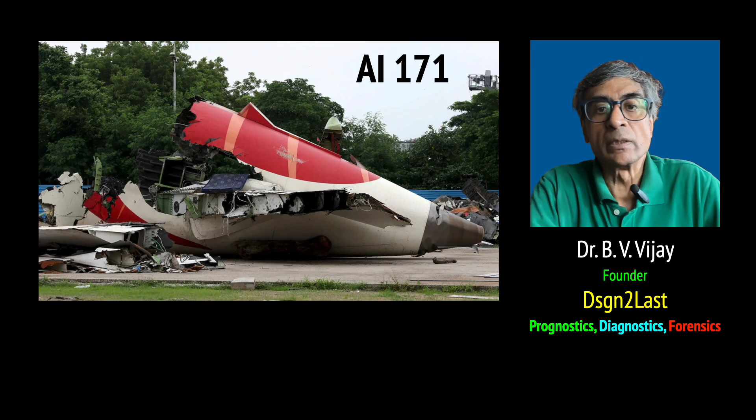Hello everyone, this is yet another video on the AI-171 crash and the fuel control switch system. Since the last video I posted in December 2025 on the GM ignition switch and the deadly parallel between them, I looked into the operation of the FC switches during the engine startup phase on the ground as the aircraft are being pushed back.

Of course, not from the AI-171 but from other aircraft of the same class, the Boeing 787 Dreamliners. I did it because I suspected there is a possibility for the engine excitation to reach this fuel control system, the switches system, if the frequencies were to clash.

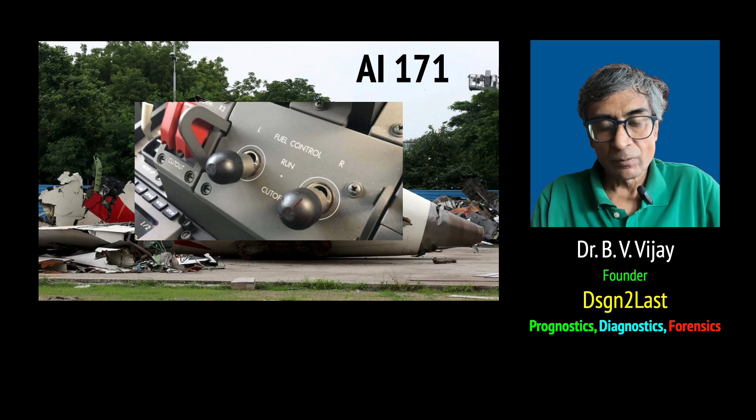Now I am led to believe from what I'm going to show you in this video that safety seems to be on the edge when it comes to the fuel control switches. That's plainly because I'm finding a serious crossing of the engine excitation with the operating spectra of the fuel control switches. It's not necessarily a reason to be panicking about, because aircraft are flying, of course, with the same characteristics more or less of the engine excitation and the operating spectra.

I'll try to explain why we might have seen something different happen in the AI-171's case. Okay, so let's get started. This is exactly what I've done.

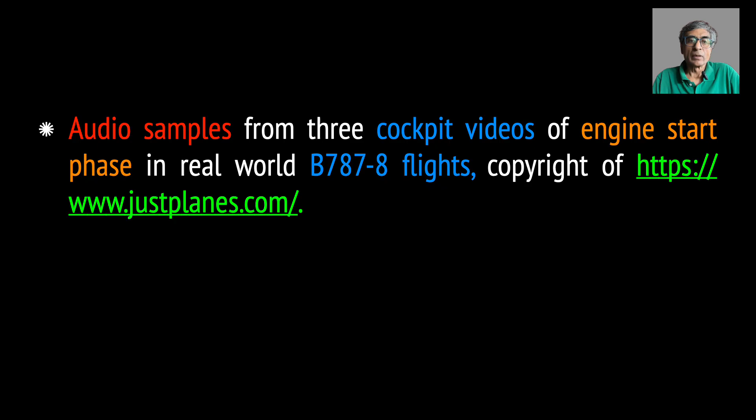I got hold of 3 cockpit videos of the engine start phase from real-world B787 flights, thanks to the YouTube videos posted by justplanes.com, a big shout out to them. From these audio samples, I extracted the spectrograms in the intervals in which only the FC switch operations were taking place. I had to weed out things like cockpit conversations between crew, ATC and crew, ground and crew, and other operations besides the FC switches.

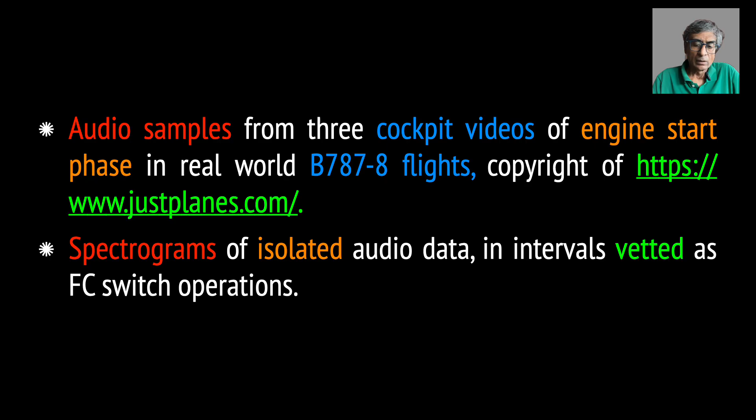I also went for a 4th flight, independent of these 3, in order to capture the engine's content from the takeoff run. If you remember the preliminary report of the investigators last year, it clearly said that once the AI-171 got airborne and reached a speed of 180 knots, both fuel control switches transitioned from run to cutoff within a 1-second interval. So I am trying to see if I can reach that same condition from other data, public domain data of course.

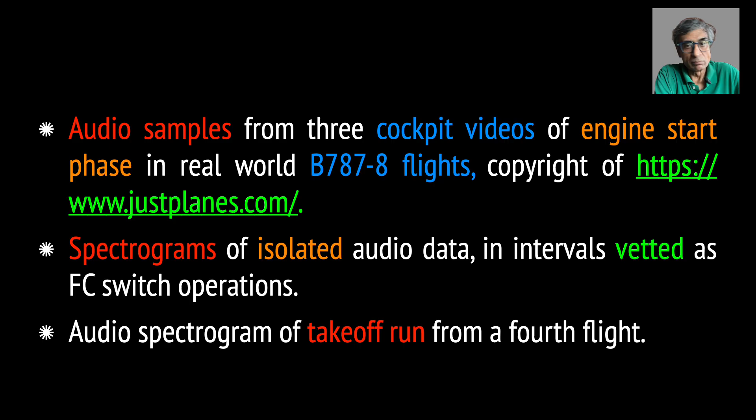I may not be able to prove that this indeed was the cause of the transition, but at least I believe I have narrowed down the possibilities, or opened up a new room for thought. So the billion dollar question: who is the likely culprit in the run-cutoff transition? I cannot prove it, but I can at least get a little nearer to it than how far I've gone till now.

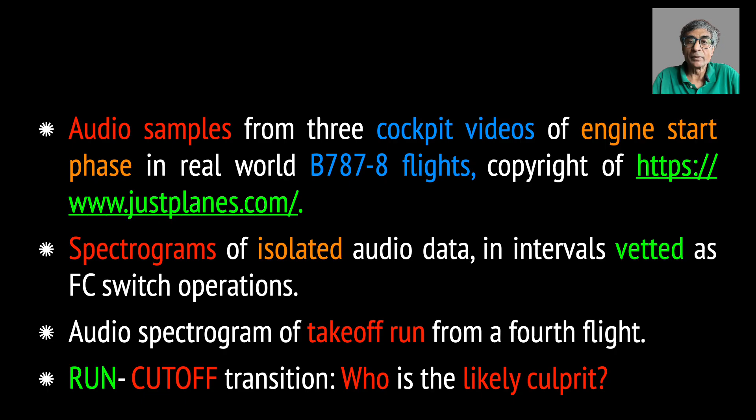All right, let's get to the first video now, the cockpit video. This is a video of a flight between New York JFK and a place called Casablanca, and I'm calling it NY-CB for short.

On top left you see a timer, 00:00 and so on, which starts ticking once the video plays. The units are in milliseconds, seconds, minutes, and hours. You need to focus just on the milliseconds and seconds, because the operations you're seeing, like 15363 to 55 and 21582 to 75, are all in seconds — but please don't mistake this for the actual duration of operation of each switch.

It is not. These are only the durations in which the acoustic content was very strong. There's always a silent part of the operation which doesn't produce any content. So the actual time duration of a switch operation is not merely this time, but much beyond it too. Because there was, and probably still is, some body of thinking that the pilots themselves did the transition within that 1-second interval, this should not mislead you into believing that might have happened here because of these timings.

All right, so just focus on the timer and these 2 intervals out here. They're going to always be present during the video, and try to see if you can sync the 2 things together as they happen. All right, let's get started.

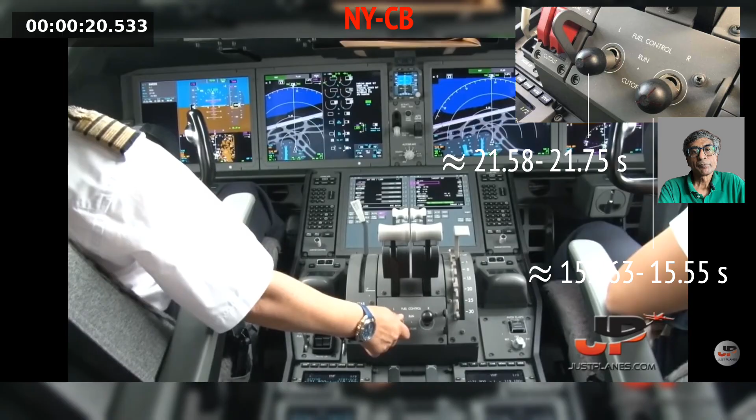All right, so I guess you could clearly see the switch being operated. This is one of the only videos which clearly shows the camera focusing on the switch itself, so you have additional visual information too, apart from the audible switch operation.

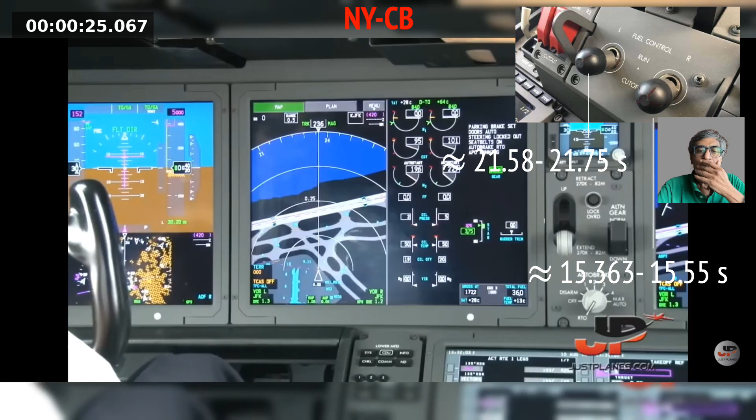Let's get to the spectrogram. This is the spectrogram of the right switch operation between 15.363 and 15.55 seconds. You see a kind of comb-like structure roughly there, and I've thrown in a line at 660 hertz. I'll come back later to what this line means and why it's important. For now, just note that this 660 hertz is running through a very strong part of the switch operation spectrum.

Now for the left switch, yes, this is a little clearer than the previous one. It's also got a clear comb-like structure, and again 660 hertz runs through the strong part of it.

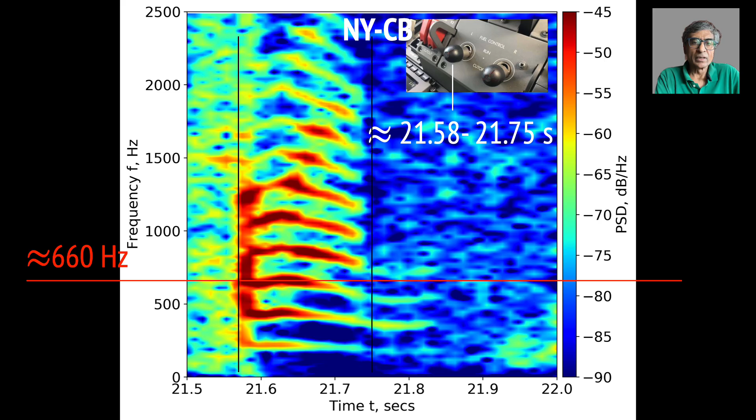Now let's get to the second video. This is for a flight between Heathrow, London and Amman, Jordan, on Royal Jordanian Airlines. So you know what to be looking at, just like the last video.

Okay, let's get going. Start and push. Please make sure the area is clear, all the doors and panels are closed. When you're ready, advise me to release parking brake. Yes, I already said that. Everything's all complete downstairs, release brakes please. Parking brake is released.

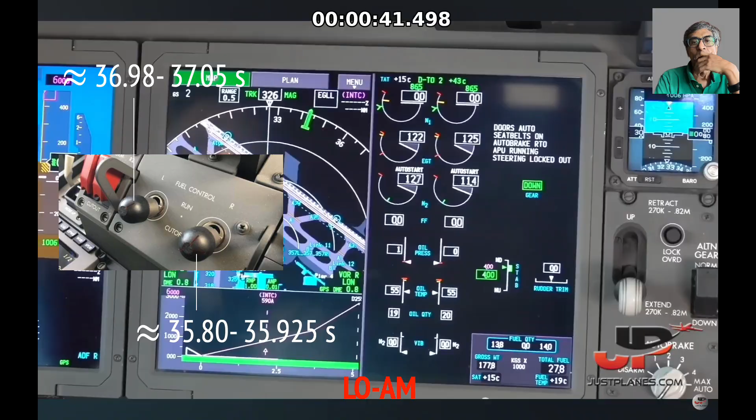Right, so you can see the two engines have started. If you look at the auto start on the cockpit display there, 137 and 125 RPM. Let's get to the spectrogram.

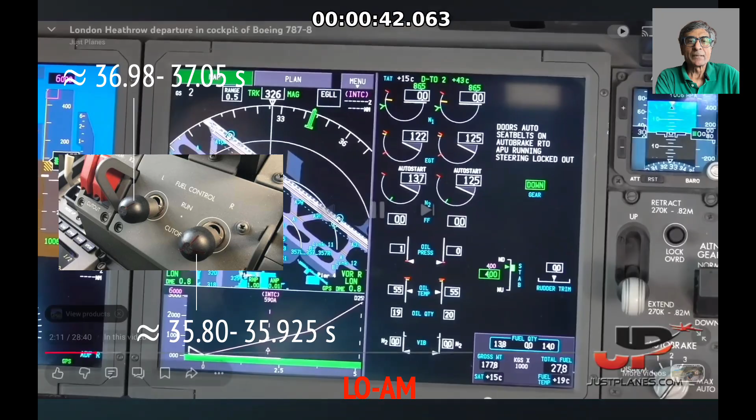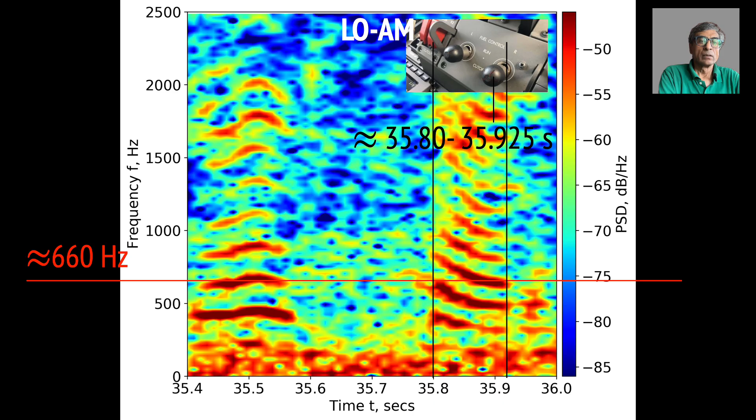Here's the right switch operation, from 35.8 to 35.92 seconds. Again, a similar comb-like structure that you saw in the previous flight, New York to Casablanca. 660 hertz, like always, is still cutting through the strong part of the spectrum.

For the left switch operation, that occurs between 36.98 and 37.05 seconds. Same thing holds here: 660 hertz cutting through a very strong part of the spectrum.

Now let's get to the third video, the last in this 3-video series on the cockpit engine startup phase. This is between Stockholm and Los Angeles, STLA as I call it.

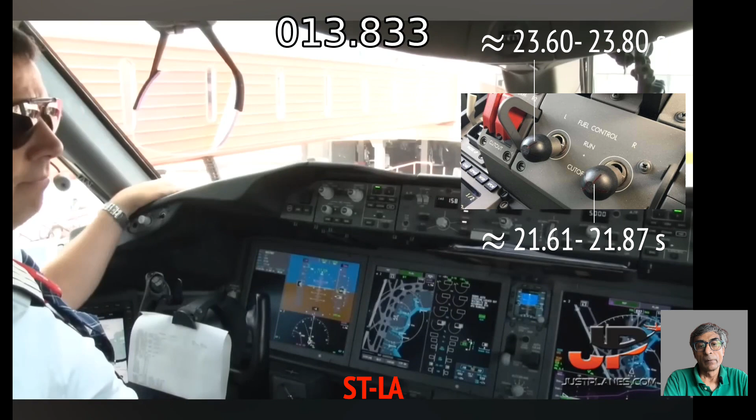Okay, on gate 34 I guess. Yeah, most likely. Okay, sure, brakes are released. Commence the pushback, brakes are released. You can start 2 and 1 in sequence. Copy that, we'll start 2 and 1 in sequence. Oliver, start right engine. And start left engine.

So I guess you could clearly hear the right switch click, but the left was a little bit lost in that ambient noise out there, in the hiss. So the spectrograms you're going to see also reflect that clear character and a little less clear character. Let's get this first spectrogram, the right switch.

This is the one from 21.61 to 21.87 seconds. That strong content you see to the left of this comb structure, around just past 21.5 seconds, that's the engine selector switch, which is on the roof of the cockpit. Once that's set to run, the engine is selected there. There are two selectors, one for the right and one for the left. Anyway, the 660 hertz is still cutting through the strong part of the spectrum, which is all you need to take note of here.

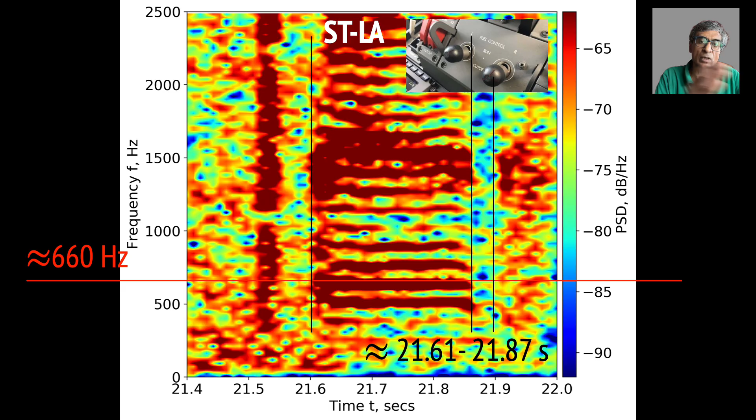When it comes to the left switch, as you saw, it was quite muffled to hear, and no surprise that the spectrogram is also a little less clear than the right switch spectrogram. But yes, the 660 hertz is still cutting through the strong part of it anyway.

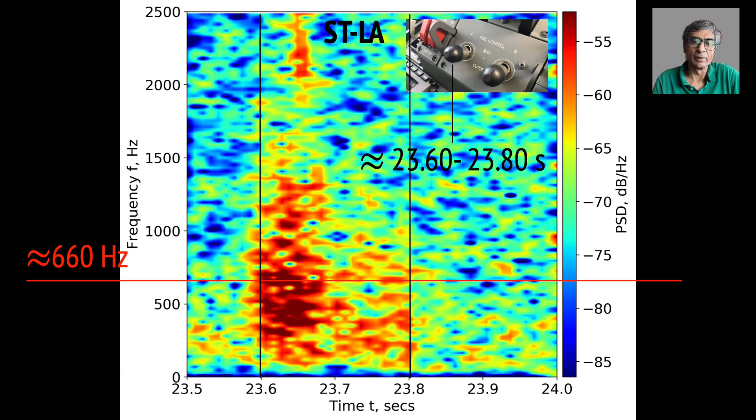Now let's get to the takeoff run. The timer is in the top center, and this is between Amsterdam and St. Martin, also a Boeing 787 Dreamliner. That's very important because I need to ensure the character of the engines is no different from that of the AI171. The things to watch out for here are the V1 call automatically coming from the cockpit, and the rotate call that comes from the crew member. Okay, let's get going.

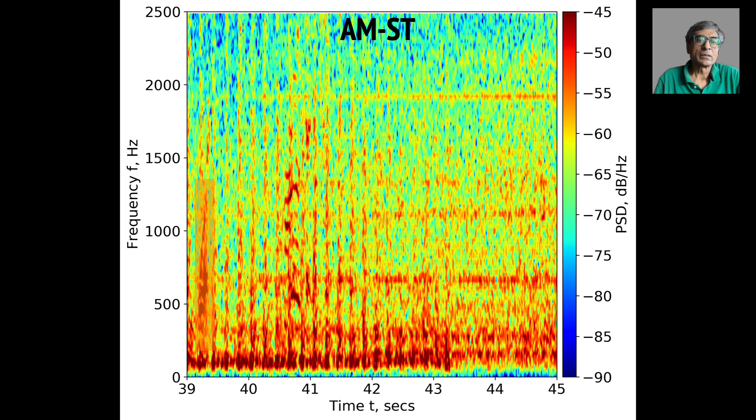You must have surely noticed that shudder in the cockpit somewhere around 47.5 to 48 seconds. And you could clearly match the V1 at 39.25 seconds with the rotate call from the crew member. Let's get to the spectrogram. 39.25 is the V1 and 40.5 to 41.25 is the rotate. So that's the V1 there, and that's the rotate out there.

If you look at the bottom of the spectrogram, and go back to the video, you would have heard a lot of duck, duck, duck, duck sound as the aircraft was reaching VR speed. The bottom of the spectrogram, around 125 hertz, is that discrete, comb-like structure. That's all that content flowing into the microphone here.

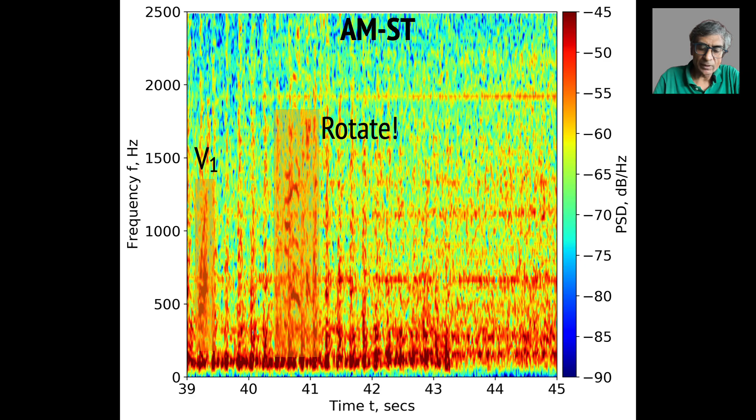You see that just past this line at 43.25 seconds, that significantly drops. That's because the nose wheel is now off the ground, so no longer do you have any ground input coming in of that strong kind. But yes, that content still persists, a little weakened, I guess because the nose wheel is still spinning, so it hasn't lost all the content there. Something from there is still reaching the cockpit.

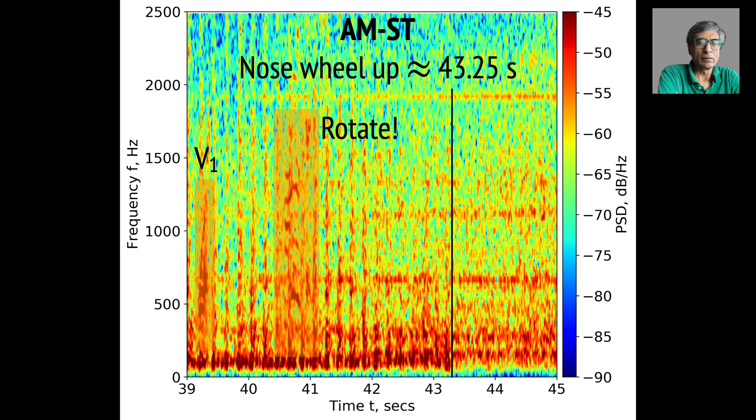Anyway, the point to note is not any of these things, but really the 660 hertz line is here. And you do see strong content at 660 hertz that seems to possibly even get stronger as you're nearing the VR.

Well, this rings a bell, obviously, right? Because if a frequency seems to be from an engine, and seems to be the same as that in the FC switch operation spectrum, it's likely there's a door that's open in the FC switch system to invite this energy at this frequency into the system.

Well, does it really mean a resonance and immediately a transition? No, it does not, because obviously all these flights which I have videos of, they are all flights that flew and are probably still flying today. So exactly what might have been the reason, I'm trying to offer the best explanation I can, because I'm working with very limited data, as you can obviously see. I can only make engineering guesses or engineering judgment. I can't prove anything or establish anything.

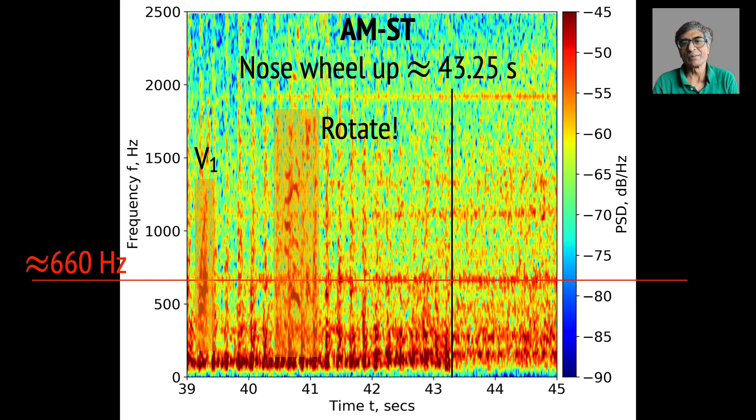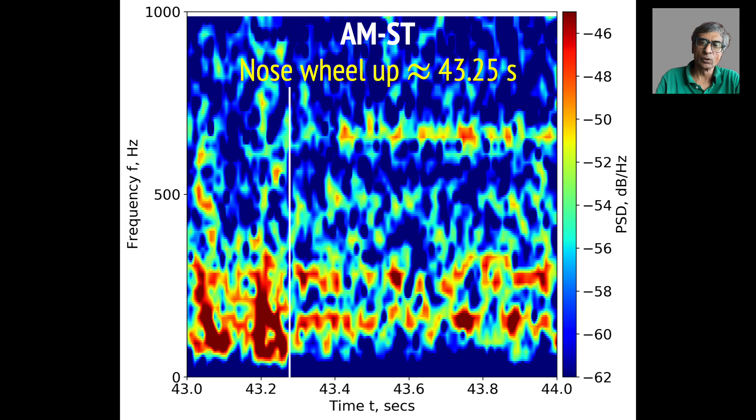Anyway, here's a little zoom-in of the same spectrogram, in case you couldn't figure things out clearly before. You can see up to 250 hertz, strong content lying there to the left of 43.25 seconds. That's coming from the ground and weakens as the nose wheel gets off. And at 660 hertz there, you see that component being relatively strong.

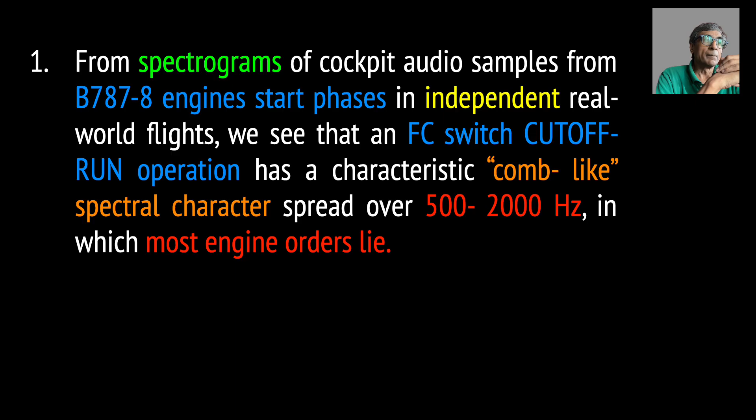All right, so let's summarize all the observations before we get to any analysis. What we've seen is a kind of comb-like spectral character of the FC switch operation from 500 to 2000 hertz, and the same range in which most engine orders also lie. If you go back to my very first video, posted before the preliminary report came, you would have seen that many of the frequencies I captured from that teenager's video and the spectrogram analysis also lie in this 500 to 2000 hertz range.

And also we can see that just as the nose wheel gets off the ground, there's a spike in the amplitude at 660 hertz. Right, so now let's see what happens when you try to argue the clashing of 660 hertz from the engine with the content in this FC switch operation.

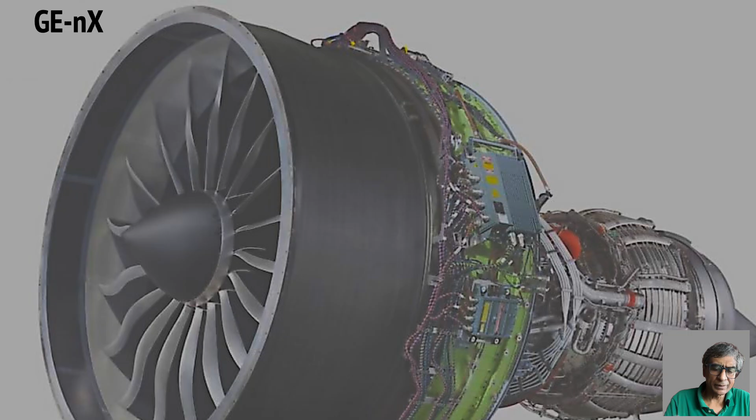So I'll start with the topmost picture of a GEnx engine to make my point here. The GEnx is the one that powers all the Dreamliners. If I were to represent the energy output of this engine, I might picture it like this, with the green part being, of course, the useful one: the thrust, the electric power, and the actuations.

And there's always, of course, a red part in any mechanical system. There's nothing that's 100% efficient, so it's not fully green. That's the waste part. But this is not a waste in the sense of a commercial loss. It's a waste in an engineering sense. It's a waste of what? It's a waste of energy.

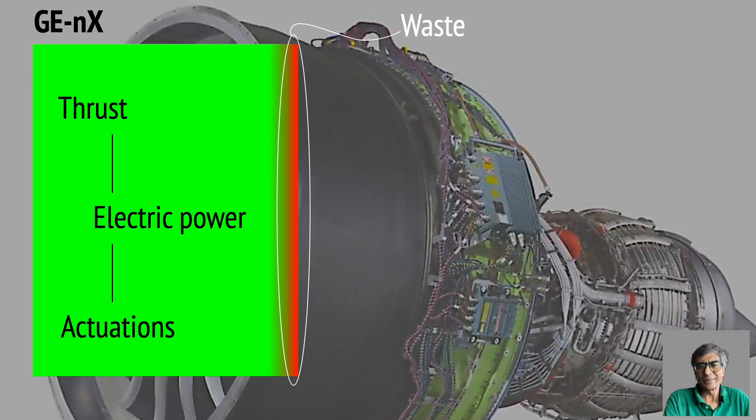And you can't just wish away energy and say, get lost, I don't need you. Energy cannot be asked to leave where you want it and as you want it. It will flow in its natural way through the system, and it will do work. The only way energy can be used up is by doing work, either as dissipation itself, in which case it's a non-conservative system, or maybe by excitation of something which is possibly conservative. Anyway, okay, so where does all this waste go?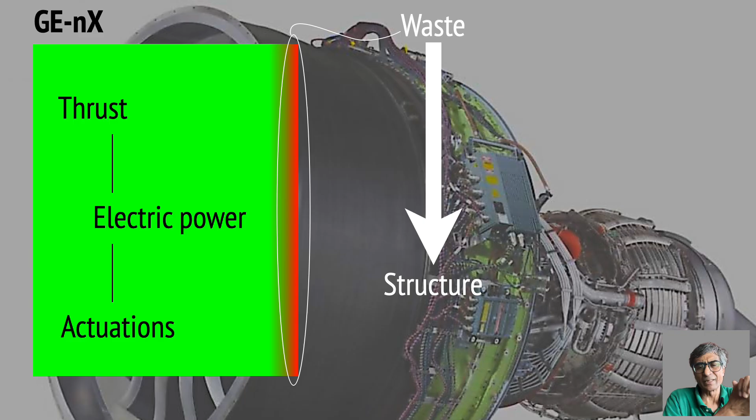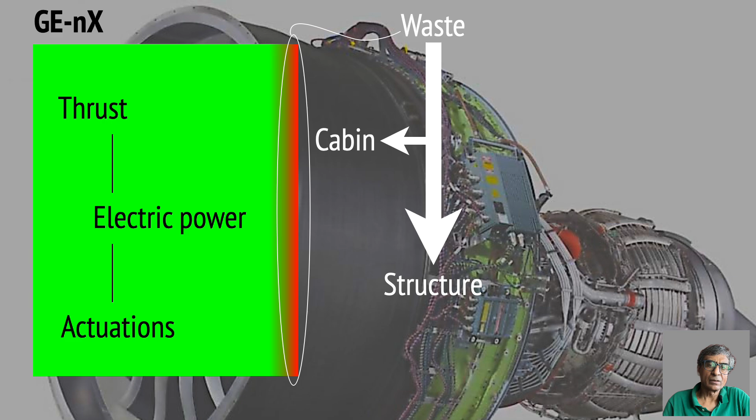It does go to the structure, and that's exactly why you saw the cockpit shudder between 47.5 and 48 seconds in the last video. It gets into the cabin too, as you'll recognize, because you're given earplugs on long haul flights to cut off the hum from the engines. But these are just annoyances at most. The real danger is because, at least in the AI171's case, and possibly a potential danger in all other aircraft too, part of that waste gets into the cockpit.

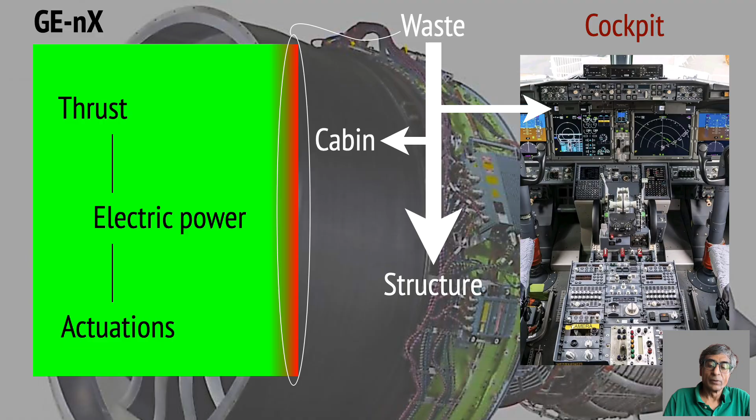Now let's see what it means from a structural dynamics point of view. Before I get there, I need to first look at the forward fuselage structure and the nose, which Boeing calls Section 41, the flight deck structure. I look at whatever is inside this, because this is the structure on which you have the IMA chassis, the Integrated Modular Avionics chassis. Again, this is manufactured by one of the partners of Boeing. On this chassis sits the entire cluster of cockpit instruments - the displays, the dials, knobs, levers, everything.

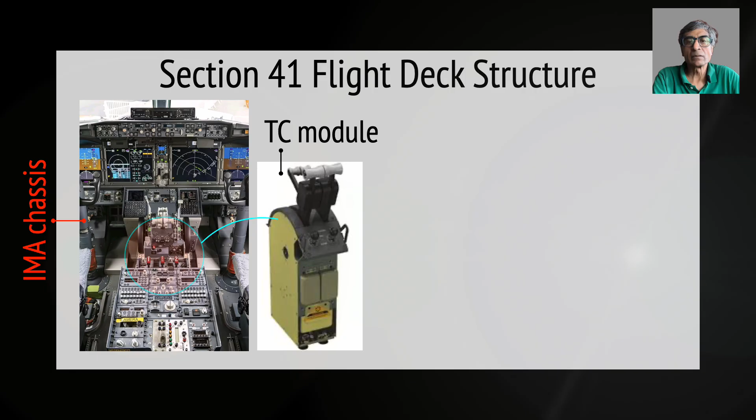Now in the IMA chassis, there's something called a thrust control module, the TC module as I call it for short. If you look at a TC module, you can clearly recognize what I'm after: it's the fuel control switch system, the FC switch module. And of course, in this FC switch module are the two FC switches themselves.

Now, I didn't put this up just to look at the architecture of things. I put this up because I wanted to bring out the concept of sources and receivers here. So what do I mean by that? If Section 41 flight deck structure is the source of engine's energy, the IMA chassis is going to be the receiver of it, one of the receivers.

Again, in turn, the IMA chassis is a source too for the TC module, so that becomes the receiver. And in turn, the TC module is a source for the FC switch module, which becomes the receiver. And in turn, yes, the FC switch module is a source for the FC switches too, but I'm not extending to that - you can obviously see it. You can extend it on your own.

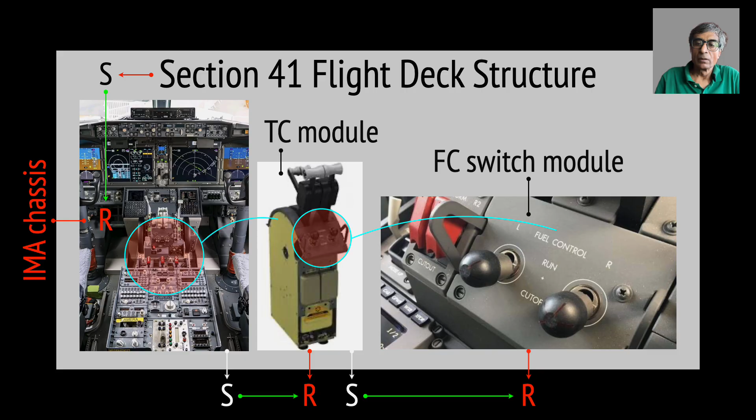So given sources and receivers, let's see what happens when a source and receiver's frequency clash. Let's say we've got a receiver with 3 spectral lines, F1, F2, F3 frequencies, and the source is clashing here with the same frequencies, F1, F2, F3. If we were just a simple physics single degree system, this obviously means straightaway resonance, nothing else. But we are talking of complex shaped modules like the TC module, FC switch module, and IMA chassis, which have a lot of modes in them.

So the picture is pretty different from a single degree system. Let's see what matters as far as the multi-degree system is concerned, like any of these modules I just looked at. So the two things that matter here are the transmissibility as a function of F, the excitation frequency, and the participation factor, gamma J. The J here in both cases refers to the jth mode of this multi-DOF system - any of those systems like the TC module or the FC switch module.

So now, what exactly is the participation factor? Analytically, you can show that the participation factor looks like this. When you create an analytical model and do something called a normal mode transformation of a multi-DOF system, you would end up seeing something like this. I'm not going to go too much into theory, but I just want to put a few things essential to the discussion, and I'll try to give a simple everyday analog of the participation factor.

On the right side, you see CJ bar transpose and F naught, the two key things on which participation depends. F naught is the source excitation vector, which includes all forces and moments in the vector. CJ transpose is just for conformability of multiplication, and the bar is the result of normalization by what's called an M norm. In the denominator, that's just the Euclidean norm of the F naught vector. So gamma J is really a non-dimensional quantity.

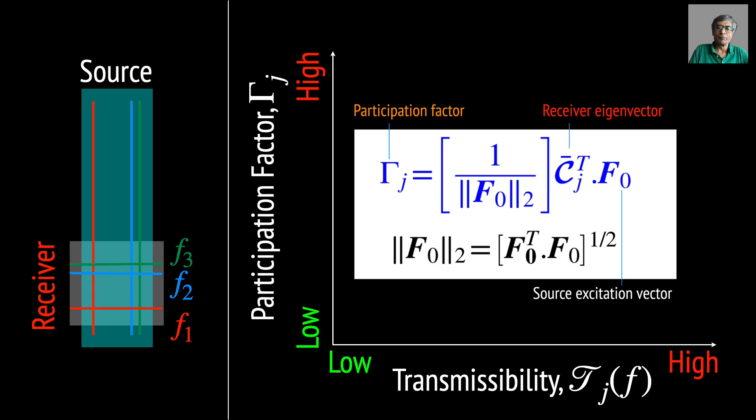Okay, anyway, let's get going. What I want to put up here is a kind of map, again a qualitative map, just based on simple common sense, engineering common sense. So you can see that transmissibility is dangerous when it's high, and participation also is dangerous when it's high in a mechanical system. So this map should look like this, the high zone being obviously in the red and the low zone being the green.

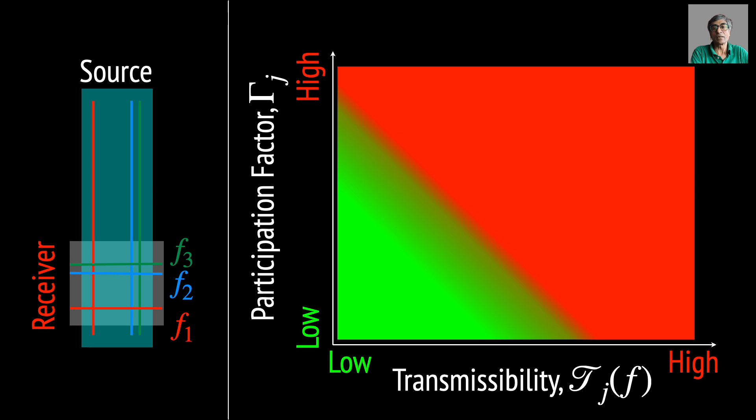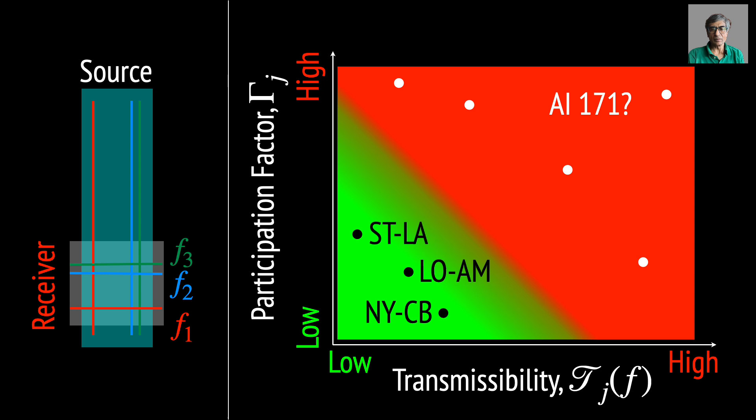But that obviously means that something must have happened here in the AI 171's case. As I said, it's impossible for me to really know which of these dots is the one that pertains to the AI 171, but I'm guessing it's something like somewhere in that red zone.

And this is also, I think, going to be hard for the investigating agency too, because I'm told that about 200 parameters are logged into the aircraft at any point of time. But I believe those 200 parameters might not include things like sensing the responses of these modules, in order to really resolve these kind of issues - whether the transmissibilities are high or the participations are high - because they are more of interest to structural dynamics people, not of interest to pilots.

So I'm sure that will also make it harder for the investigating agency, unless, of course, they find with other data that they have got only with them, that they can reach a more conclusive statement on what exactly happened there. Anyway,

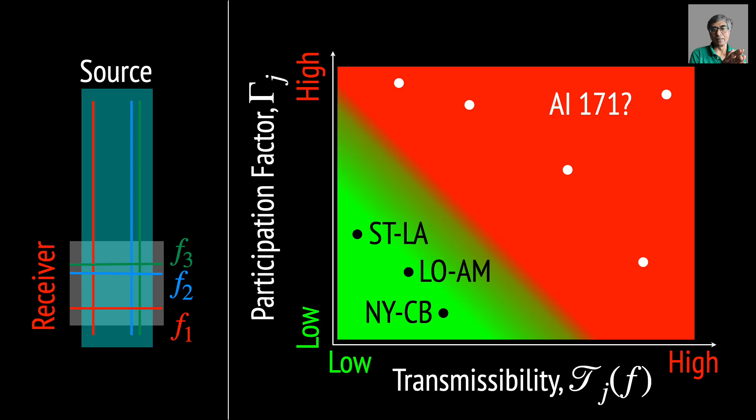So now let's say we have a 660 hertz frequency, and we are looking at what happens when something is really functioning both as a receiver and in turn as a source. As a receiver, there are 2 things that matter when you have a 660 hertz input to it: one is the participations of various modes, the other is the transmissibilities of various modes. Transmissibility is only a scalar characteristic, solely dependent on the proximity of the excitation frequency at 660 hertz to the modal frequencies that are sitting there.

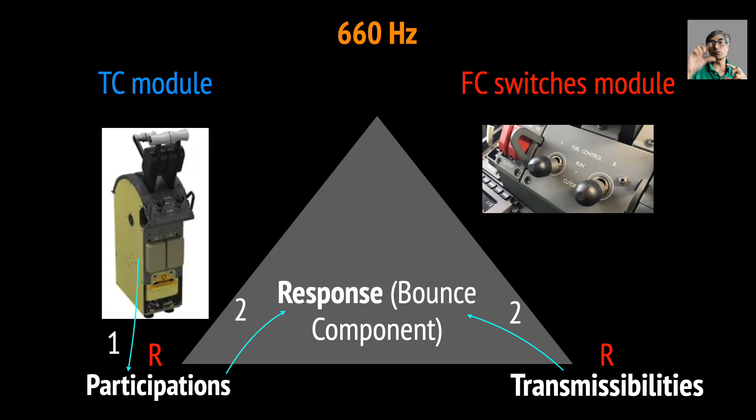Alright, so let's look at a scenario where we have 2 modules out here, the TC module, which is both a receiver from the IMA chassis and a source to the FC switches module. So as a receiver, what do you expect from the TC module? Its own response, as far as the bounce component is concerned. We remember that in one of the videos earlier I had mentioned the bounce mode being the one that's obviously should have been there in order for the transition to have happened, because the bounce mode is behind it.

Bounce mode excitation - strong excitation in the bounce mode or a strong response to the bounce mode - would obviously bring the switch out of its socket, and in the environment it is sitting in, there's surely some amount of a lateral component across the bounce mode, and that's enough to make the transition. So everything boils down to the extent to which the response bounce component is getting affected by all the participations and transmissibilities of the modules out there.

Now in turn, as this TC module is also a source for the FC switches module, what's going to happen is it's going to provide an excitation to the FC switches module, and that excitation is to the extent the response is limited by all the participations and transmissibilities. So it's a response bound excitation acting on the FC switches module. And in turn, the FC switches module is now a receiver, so its own response depends on its own participations and transmissibilities too, and therefore whatever it throws into the switches themselves would again be this response bound excitation.

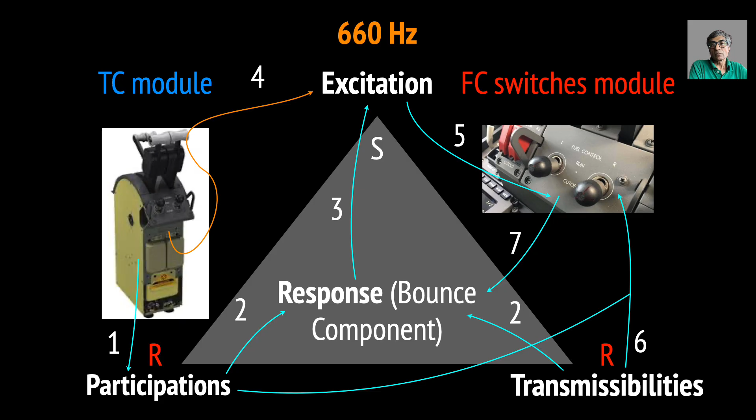Let's try to get to the final question and find an answer. At 660 hertz, we've seen that for the transition to happen there should have been a force, F Bou as I call it - a force required to pull the switch out of its socket. But this force isn't coming from the pilots, it's coming from the environment in which the aircraft, AI 171, is flying. And that F Bou is a lot more than the typical force a pilot applies to do the transition cutoff to run during the startup phase.

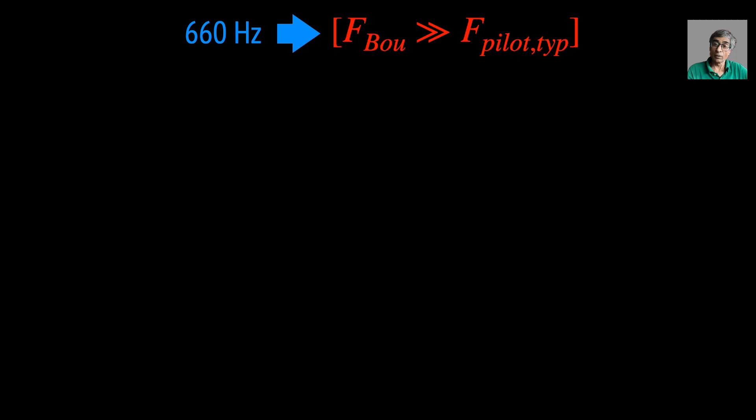So who is the likely culprit? There are three candidates as I see it: one is the FC switch itself, the next is the FC switch's module, and the third is the TC module. It's also possible that it's a combination of both the FC switch's module and TC module, which might have coupled frequencies that clash with the 660 hertz.

I can't rule that out because, as I said, I'm just someone working with public domain data from YouTube, and I don't expect I could go that far to really figure out the numbers needed to answer these questions. Anyway, as a person in structural dynamics, I would look at it like this: the FC switch itself I consider a very unlikely candidate for the 660 hertz clash.

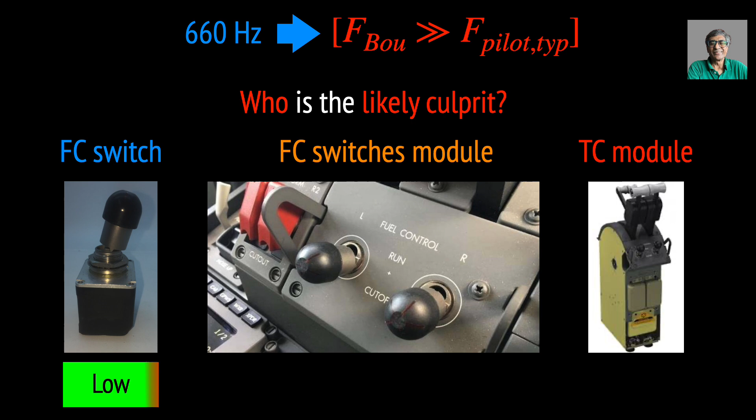Why I'm saying that is because 660 hertz is a pretty large frequency. If you expect the switch itself has that frequency, my gut feeling from various systems I've worked on is you'd need a very massive force to pull this switch out of its socket, which the pilots certainly don't use. So that makes it very unlikely to be the culprit.

That brings us to the next possibility: the FC switch's module being the culprit. I place this as a moderately possible culprit because, though I don't have numbers to justify it, between the FC switch and this module I'd place more suspicion on the module since there are a lot more modes here and therefore more possibility from a statistical point of view - no more than that.

But when it comes to the TC module, I have a high suspicion that this one is the culprit behind - rather, absorbing - the 660 hertz frequency content. Why I'm saying that is because of what happens whenever flights land: there's a lot of impact on landing. It doesn't necessarily have to be a hard landing - even a soft landing has a kind of shock that passes onto these modules. The TC module is the heaviest of all three, so the largest inertial forces from the impact would be seen in this TC module for the same acceleration input.

So over time, my guess is there's been some degradation of frequency in the TC module of the AI 171, bringing it down maybe from something like 1000 hertz or so - whatever it might be in other flights, in a normally healthy module system - down to 660 hertz on that fatal flight. This is, again, just a hypothesis. I can't prove it because I don't have clear data to prove it. That's as far as I can take it.